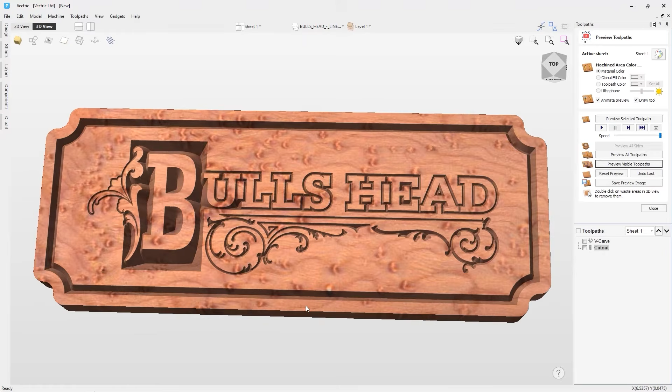Right in our 3D view, we can go ahead and double click on any of this waste material, so we'll get a good idea of what our end sign is going to look like. And that looks really nice. So you can see how quick and easy it was to take in a set of prepared vectors, create a quick VCarving toolpath, add in a profile toolpath, and then preview the output that you should expect to see on your machine. Now let's go ahead and explore the idea of maybe taking this and doing a few little edits

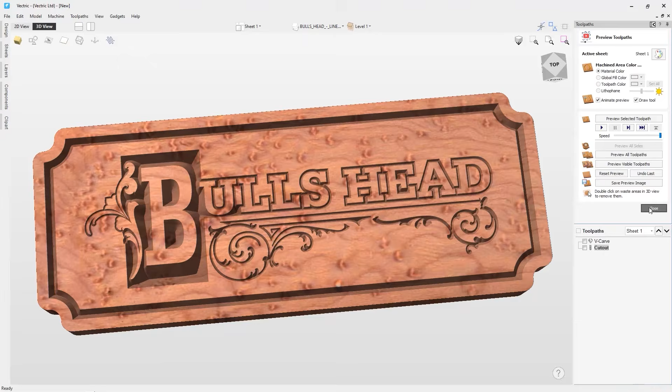So that it's attractive to a larger audience. Let's close this down, look back down on top of our material. Let's go over to our 2D view, and also we'll flip back over to our design tab. Press F on our keyboard to focus right in on that sheet and unselect everything. So the first thing I want to think about is what text I could put on this sign that would make it a little bit more interesting for a larger audience. I know in my circle of friends, everybody likes a nice backyard barbecue, so I think that if we replace the bull's head text with backyard barbecue, that would look quite nice, and maybe even add an arrow so they know what direction to go in when they're visiting.

So what we're going to need to do is find a font that looks a lot like the bull's head font, because we're going to try and keep the B, since both phrases start with the same letter, so we may as well keep this B in place where it is. But we are going to need to match up the font with the B.

So let's go to our draw text option, and we're going to type in backyard barbecue. And that looks pretty good. The font, Rockwell Condensed, seems to be a nice match for what we want, so that's great.

So now what I want to do is get this text sized up to an appropriate size to replace this bull's head text. The first thing, like I mentioned earlier, is that we don't need the B. Since this is still a text element, I can go back to my draw text tool and remove the B from that, and it will be updated in my 2D view appropriately.

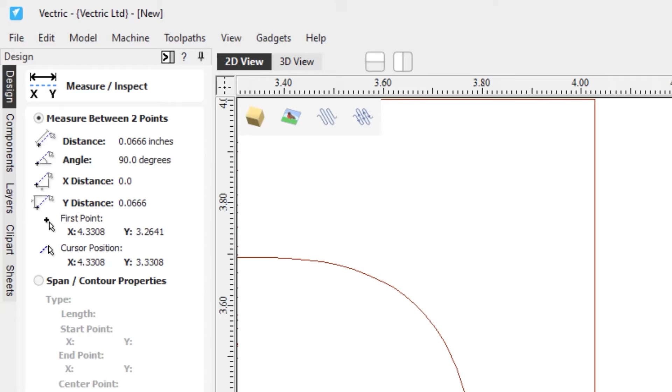and we'll click on this node and pull it straight up until it snaps to that vector border. And you'll see over on my left-hand side under the measurement tools dialog, the distance is 0.0666, so we're going to make that 0.067. We're just going to make a note of that because we're going to need that in a little bit. Okay, let's close that down, and we'll zoom out.

Now let's go ahead and delete all of this text that we don't need and any other vectors that come along with it. Now we're going to need to cut this vector so that we can finish off this line up and down to make this more of a real rectangle. And that'll all make sense why we're doing it in a bit.

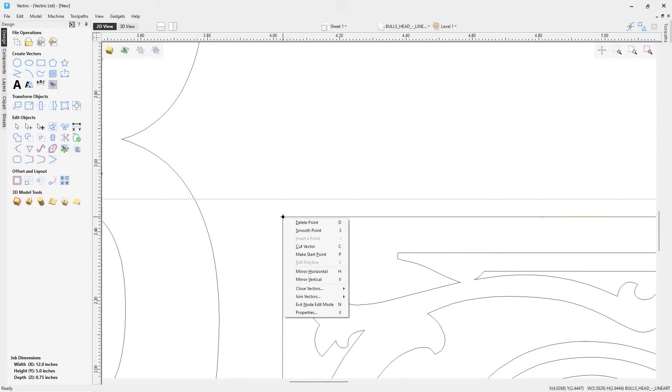So we'll select that, we're going to go into node mode, and zoom in on this bottom node here. We'll right click on that and go down to cut. Then we'll go ahead and scroll up to our other ones, and you'll see there happens to be two really close together. So we're going to zoom in nice and tight, right click, and go ahead and cut that one. And then we'll zoom back out again.

And you'll see that now we have gone ahead and separated this part of that vector with this other part. So let's go over to our selection mode.

We'll select this bit of the vector and delete that out of there. We'll reselect this, and now we need to close this off. So we'll right click on that and go down to join or close. We'll choose with a line, and there we have it.

Now we're going to grab our text and move it into place where we think it needs to go. So it's going to go somewhere around there. We'll zoom in and make sure that snaps to that guideline as it should. That looks pretty good, and we're just going to nudge it over a little bit, maybe to there.

Zoom back out again. Now, if you remember correctly, we've got these guidelines set in place, and that was the height of our text. We don't need to worry so much about the Q, because what we're going to do is grab this top control handle and drag that down until the R fits inside of that.

There we go, so that's all good, but that little squiggle is causing us a bit more of a problem because it's running into this bottom graphic that we don't want. So we're just going to go ahead and delete out these guidelines, and to do that we can just drag them back up to the ruler again. We don't need those anymore.

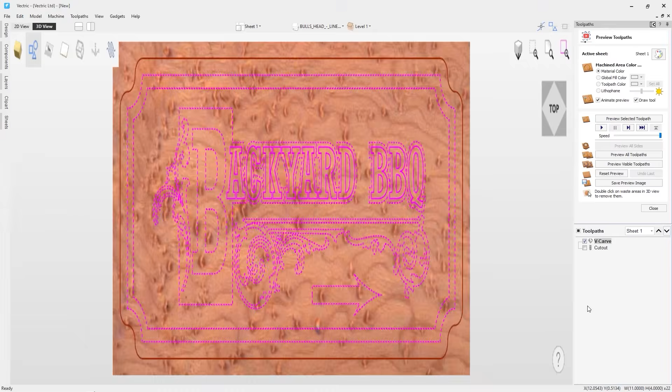We're going to go ahead and calculate that with the settings we already have, then we can preview our visible toolpath. As always, because this might be a production piece, if we see any issues now, we're going to want to change these before we save these off and run them on our machine. But overall, that looks really nice.

The next thing we're going to do is go ahead and recalculate our cutout toolpath. Just double click on that. We're going to leave off the tabs right now, but when we get around to actually creating the toolpaths we're going to save off, we need to make sure we add those in. So let's use the same settings we had before, recalculate that, and preview our visible toolpaths.

Go ahead and delete our waste material, and then we can position that where we'd like it to be. Then we can save a preview image off onto our hard drive or onto a USB key that we could use again to send off to our clients. We just need to give it a name, so we're going to call this... okay, I've chosen JPEG as my file type, and I can just go ahead and choose save.

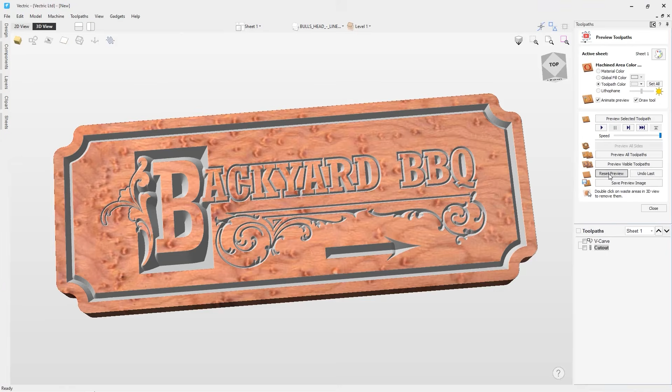So let's reset our preview, close this down, and go back into our cutout toolpath, and we want to add in some tabs. In this case, a length of 1/4 inch is going to be fine, a thickness of 0.1 of an inch is going to be fine, and we can edit our tabs. Now we can tell the software how many tabs we'd like to put in there. We're going to put in 4, and it'll automatically place those tabs where it thinks they should be, and they look great. They're on nice flat areas, easy to remove, and I can sand down those spots if I need to. That's great, so let's close this down.

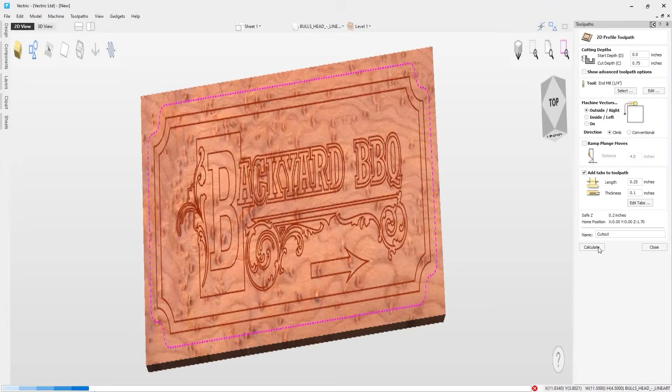Let's recalculate that toolpath. Let's go ahead and preview all of our toolpaths again. So there's the VCarving, and there we have the profile cut, and you'll see that we have tabs in place.

Now I'm not too worried that I don't see in the 3D view any material here holding this part in place. I know that my material is actually wider or taller than what it is here, so that's okay. I'll have lots of material on both sides of this and on the ends to hold it in place, so I'm not worried about that at all. And when I set my XY datum, it'll actually be slightly inside of my material, so I'll have that support I need. And that looks great.

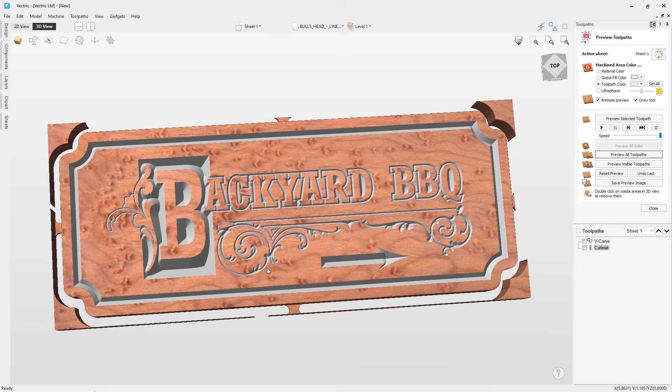So let's go ahead now and close that down and save off our toolpaths.

Now we're going to make sure that we save off all of our visible toolpaths. So we're going to turn all of our toolpaths on. We have our proper machine set up. This is going to be the Ooznest WorkBee Z1 Plus, and we're going to use this post processor.

So we can go ahead and save off our toolpaths, and we're just going to call this BBQ sign, and we'll save that. If we go back and look at what we have saved off, you'll see that we have 2 toolpaths saved: one is our VCarve tool, and the other is our cutout pass, which we use the 1/4 inch end mill for.

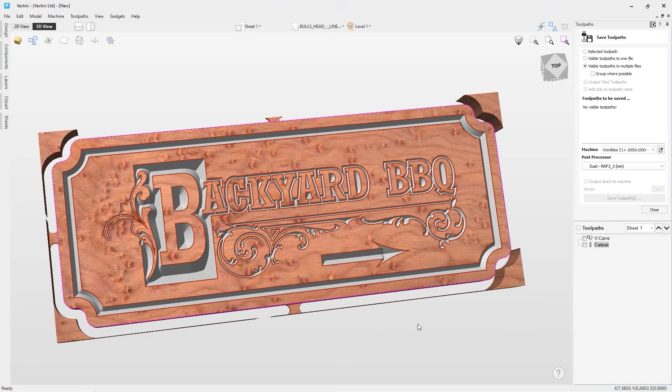Cancel. And with that, I think we have pretty much everything that we need. So I've gone ahead now and saved off my toolpaths onto my USB drive, so now I can just bring them over to my laptop that's hooked up to the Ooznest CNC.

Now in the past, we've also used a cloud service called Dropbox to get our files from our design PC to our controller PC. That might be an option that you might want to look at when you're trying to get your files moved around. Now it's really important that you know the controller software for your CNC machine. In this case, Ooznest has a great set of online files and online documentation that you can go ahead and learn how to use your software.

So let's go ahead and get that over to our controller PC and get things started.

As you can see, I've chosen a hold down method for my material that's safe and appropriate for this job. The hold downs that I have here are actually a free project you can download from your Vectric account, and you can cut them yourself if you'd like to once you get done all of these getting started videos. I'll be using these right angles here to ensure that I can swap out this piece of material really quickly and put a new one in its place. It's always going to be indexed from this corner, which is great, and these cam locks make it really easy just to pop it out and pop it back in again.

So now I've got that all safe and secure, it's not going to go anywhere. I'm going to go ahead and set my XY datum off the corner of my material. I'm going to end up zeroing my tool off the surface of my material, just like I set up in my software, and then we can go ahead and get this cutting.